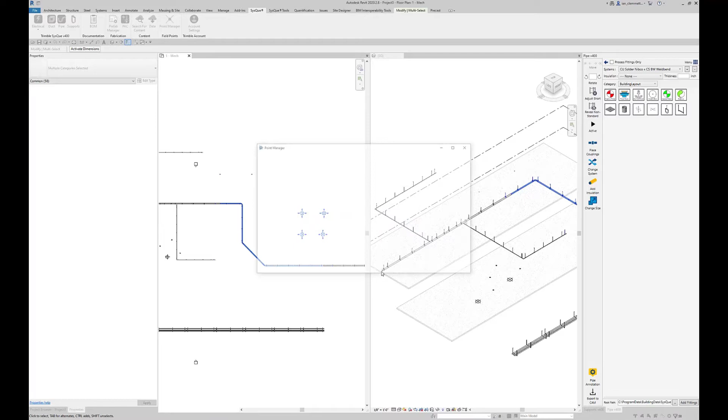So generally, I would recommend you set these rods up and make sure these are all correct before you get to this point. And so you can just say no and not have SysQue itself going back through potentially readjusting rods back the way they would have been. So I'm going to say no to this, and you get this dialog popping up here. Let me just stretch that out a little way.

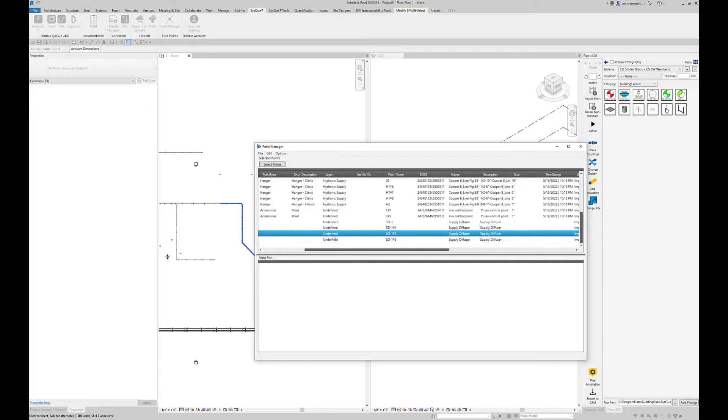So first thing I want to do here is select points. So in my window I dragged round, it's found all of these points. Don't really need to worry too much about the data. There's some of my hangers. And you can see there you've got the names coming off on the end, the type of hanger we've actually got. These were the points I've numbered or renumbered. These are ones I didn't renumber, so it's basically just pulled out the mark number in these cases. Some more I've numbered. There's my control points, and there's my grills. The ones I've actually manually placed these additional points inside.

You'll notice if the point name is the same, SysQue, because you can't have duplicate point names in the file, automatically adds a #1, #2, #3, etc. all the way through. It's done that for the hangers, and it's done that for the grills in my case, because all my grills are SD1s coming off that.

You have got the ability from here to actually export this data to Excel. That potentially allows you to go back in and maybe do some more numbering. Maybe you don't like the way it's been renumbered, you want to modify something. You do have the opportunity here of actually sending it out to Excel and then re-importing it. That will update the model and the point information.

In my case, I'm not going to do that. I'm just going to generate the points as is. I'm happy with what I've actually got here. So if I go to File, I've got New File.

Now I can open an existing file, like I was saying earlier, and actually add points to an existing file. I just want to create a new file, and I'm going to call this Test. Now you've got three file formats: TFL, MEP, or TXT. So based on the type of robot you're using, you've got three choices of file formats. I'm going to leave this as TFL.

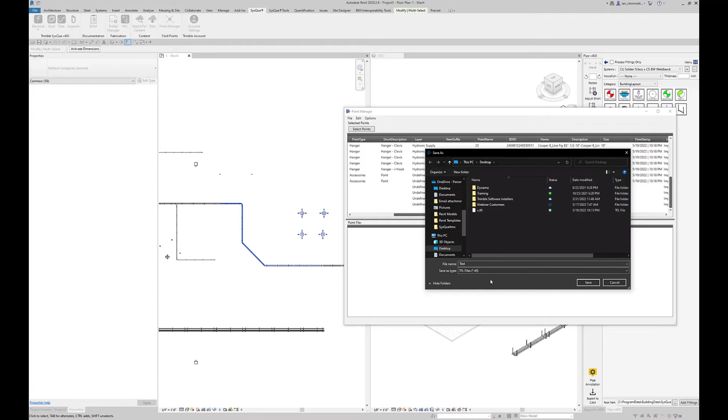The process is identical, no matter which format you choose. It's obviously just a case of what robots can read what files. So in my case, I'm going to leave it as TFL and hit save. So I can see at the top here, it has actually created that file name. This is the content, so there's nothing in the file at this point. Now you've got two methods of getting the point data from here into here.

Method one is highlight the range, and from here you have this save points to file. You'll generally find it's much easier, rather than having to manually select which points you want, if you make sure this bottom box is checked. It's just a little toggle switch, so it's turned off there, turn it back on. So that basically says get the point data out of everything at the top. I don't have to select things. I can just do save points to file.

It works its way through all of these components and generates the point data down the bottom here now. So in this case, this is actually the TFL file, and it tells me I've got 25 points. This is the information that's gone out there. So on the robot, it's going to basically break it out by the system. In this case, obviously the point name, what is actually going at that location.

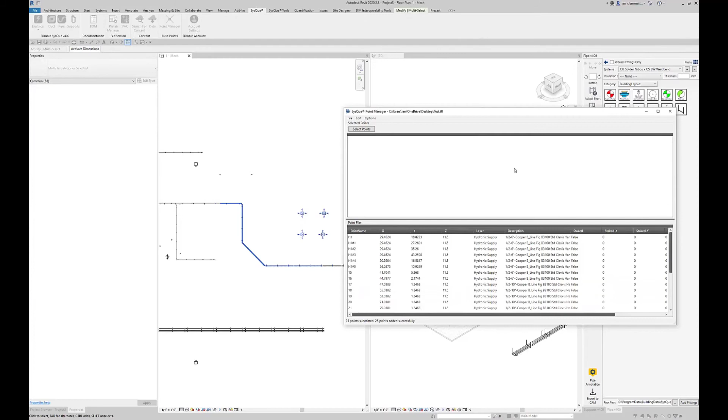So in this case, they're all half-inch Cooper B-Line clevis hangers, I think, if we drag that out. Yep, shows me the clevis hangers name off there. So this is essentially the information that's exported out to the robot. So that's all I need to do for this. So I can close out of there, and that's my point file.

That's the only file you actually need to run the robot, but obviously it's very useful for them to have a background on there as well, so they know, when they're shooting point H1, visually where it is, why they're doing it, etc. So typically from here, you would also generate a DWG. You obviously want the same area you're in. You may want to turn off some of the graphics that you don't want. Again, just use visibility graphics, and maybe get rid of furniture, site, things that are just irrelevant to what you've actually got going on there.

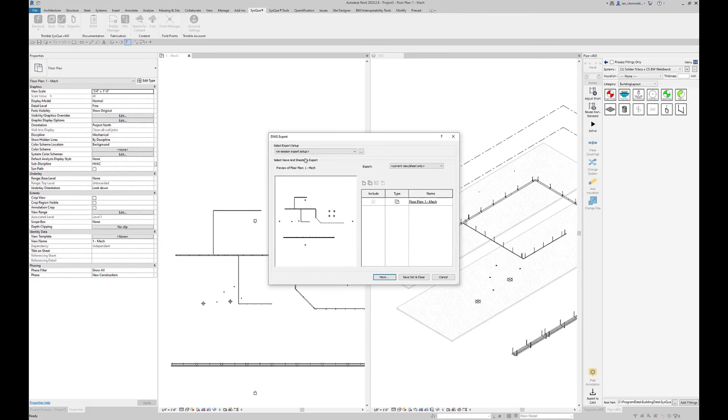Once you've got this format the way you want it to be, file, and then you've got export and CAD formats. And typically you use a DWG. Obviously, based on your robot, you do have choices. Typically a DWG. And then you can work your way through on here. And I would generally give it the same name. So I called my point file test, so I'm going to call my DWG test. And in my case, just shove that back on the desktop.

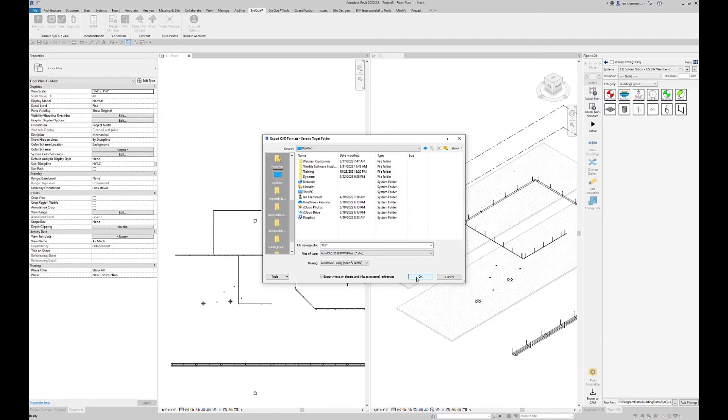So I've got the same thing: a test file and a test DWG. OK on there. So these are basically the two files on the robot, or certainly on the RTS Trimble robot. You'd be opening up the TFL file and then importing the DWG file to get the background. But that's the generation of points.